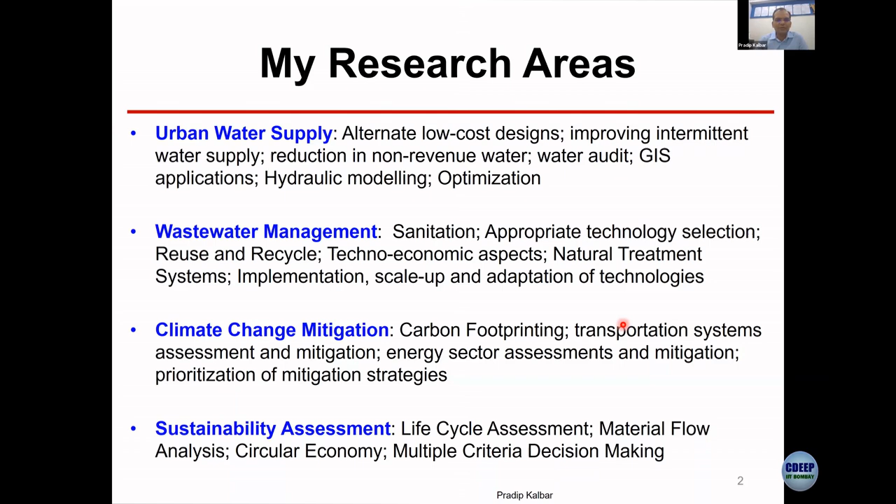So I will briefly explain a few of the topics that I have been working on. The recent work which is completed is about development of a framework and methodology for quantitative sustainability assessment. In this field, there was a lot of gap with respect to a holistic methodology for assessing sustainability of products and technologies.

So with my collaboration with Professor Monia Niero from Aalborg University, Denmark, we developed and proposed one methodology for assessing sustainability of products. This particular work recently received the Prisma Award, which is given for groundbreaking research on sustainability assessment and policy. This is the publication for which this award was given, in Resource Conservation and Recycling.

And then I also recently applied and improved this framework for selecting the appropriate location, with the help of Vinay Yadav, who was a PhD student with Professor Karmakar and Professor Dikshit in CESE. And in a book chapter, I documented the entire framework with my PhD student Deep Jyoti Das, who is currently working with me.

The next piece of work is on a quantitative approach for urban coastal areas classification. In India, there is a prevailing regulation of coastal regulation zones, which is a policy by which lands are classified. But that particular framework had a lot of subjectivity and it lacked scientific principles.

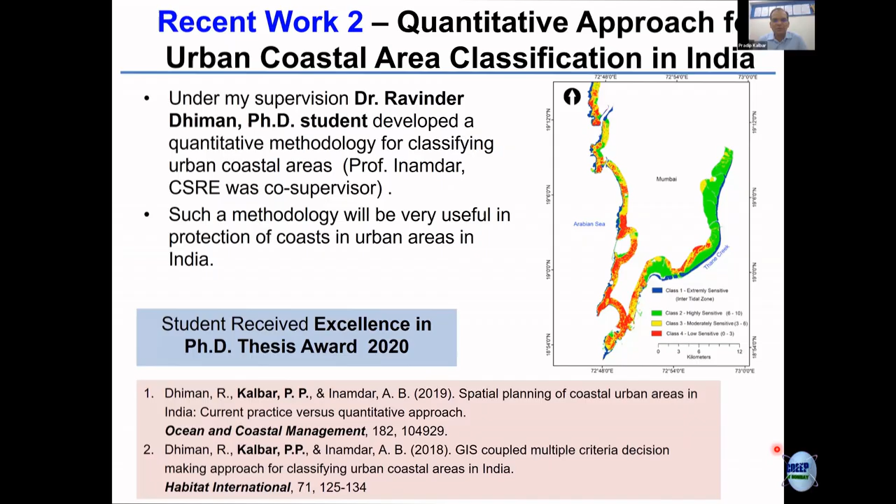So these two publications are outcomes of this work, and some are under review. And this particular student's work has received the Excellence in PhD Thesis Award for this year.

Then I have ongoing work with one of my students, Nikita Kakwani. She is working on circular economy of the urban water sector in India, because particularly for this wastewater and sanitation sector, technology is not the issue. The appropriate technology for a particular location, a particular setting, is more important. And circular economy helps in providing some impetus for adoption of these technologies.

So whatever policy gap, whatever other management kind of support is needed, circular economy provides that kind of framework.

So basically, first we reviewed the terminologies, reviewed the entire literature on what is happening worldwide in this particular sector. Nikita, in her third year, has published this comprehensive review about circular economy in the urban water sector, where we have documented challenges and opportunities.

We have proposed a framework defining basically what is reuse and recycle, because a lot of ambiguity in these terms was also observed. So the work is in progress, and now she will actually be quantifying the circular economy, at least in the urban water sector, for cities in India.

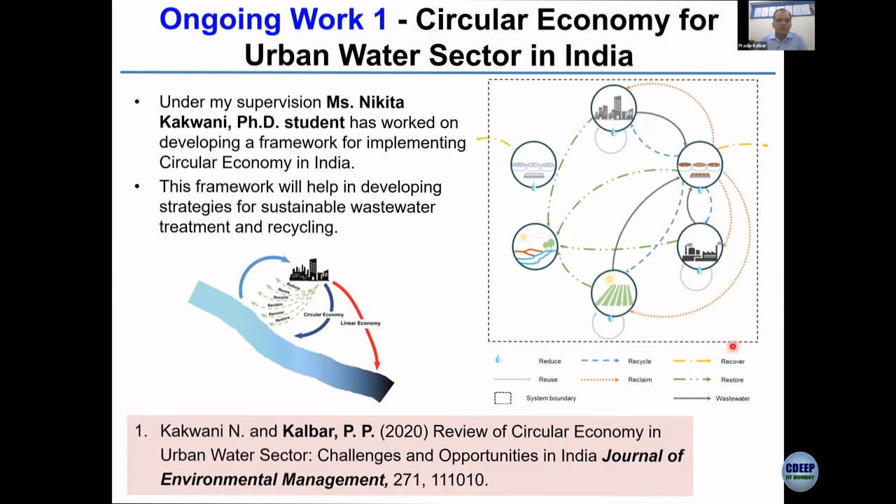So a few case studies we are working on. In this direction, I have a collaboration and a project funded by the Department of Science and Technology, which is a 5-year long virtual innovation center that they have funded with NIH Roorkee, CESE IIT Bombay, MNIT, and IRMA Gujarat.

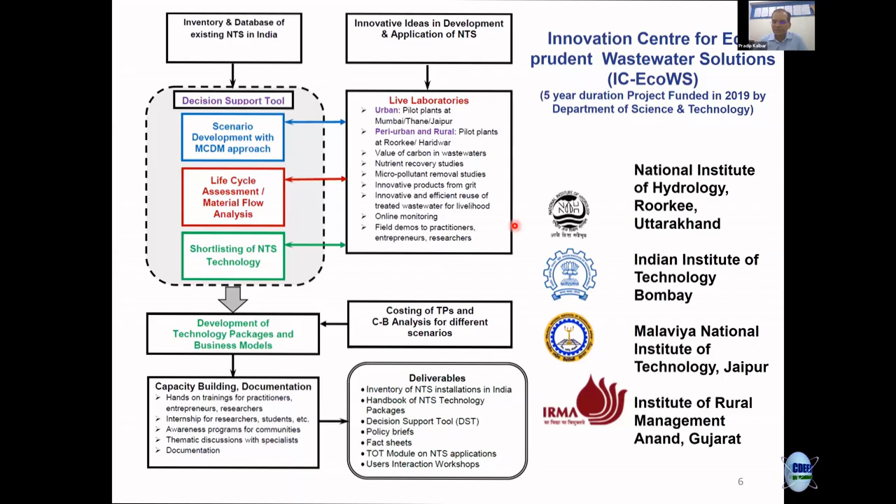And here, what we are going to do is basically develop a decision support tool for selecting natural treatment systems, which are not energy intensive, but looking at how we can promote these technologies and create suitable business models and surrounding situations. So it's a technology package development and decision support tool development, a 5-year long project that we are working on. So this is one theme of the work.

Another theme of work is environmental assessment of urban passenger transportation. I have a collaboration with Professor Nagendra Velaga from the Civil Engineering Transportation Group, and Deepjyoti Das is a PhD student working on methodology development and systems modeling.

We are basically assessing what we need to do regarding proposed interventions such as e-vehicles and car sharing models, and how they will impact or change the environmental impact of passenger transport—whether it will increase or decrease, and whether that will be sufficient to meet global and national climate change commitments. That particular angle we are investigating.

These publications are under review, and this student is soon going to conclude this work.

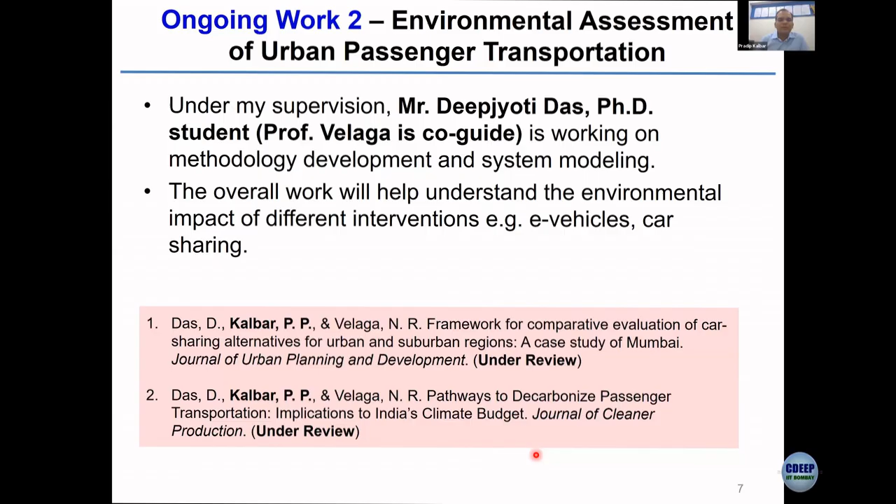The final major work area I'm working on is alternate design and operational strategies for improving water supply systems in India. This water supply system in India is a very multi-dimensional problem, not only from a technology standpoint but also involving tariffs, consumers, and government bodies. In none of our cities do we have continuous 24 by 7 water supply, which is the ideal objective. All developing countries have this issue, but why are we not able to achieve that, and how can we first improve the ground reality—that's what this particular topic is about.

Whatever solutions industry gives are not suitable for Indian conditions—they come from Western or developed countries' contexts and just try to impose them on our government. Based on my industry experience, field work, and research, I have proposed some low-cost interventions for improving this. Two students, Anuj and Abhishek, along with Professor Damani, are helping me a lot in this direction. These interventions recommended by me have been adopted by the Ministry of Jal Shakti, which has asked all states to look into and implement them.

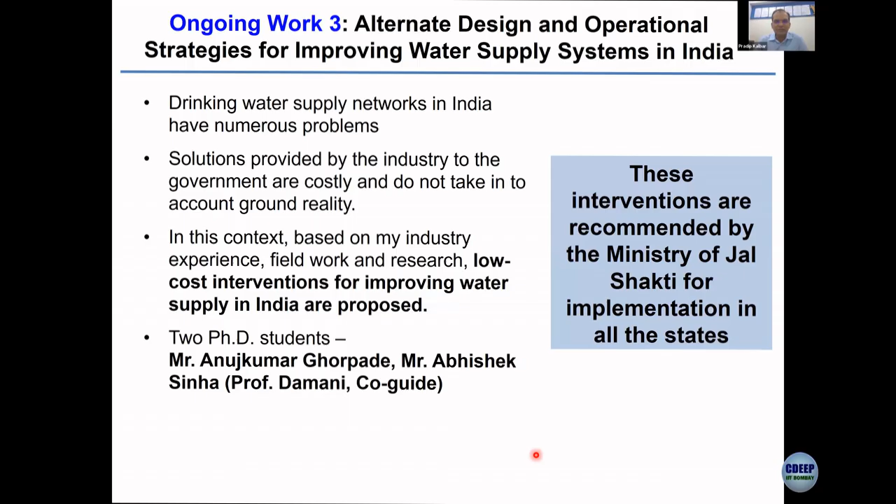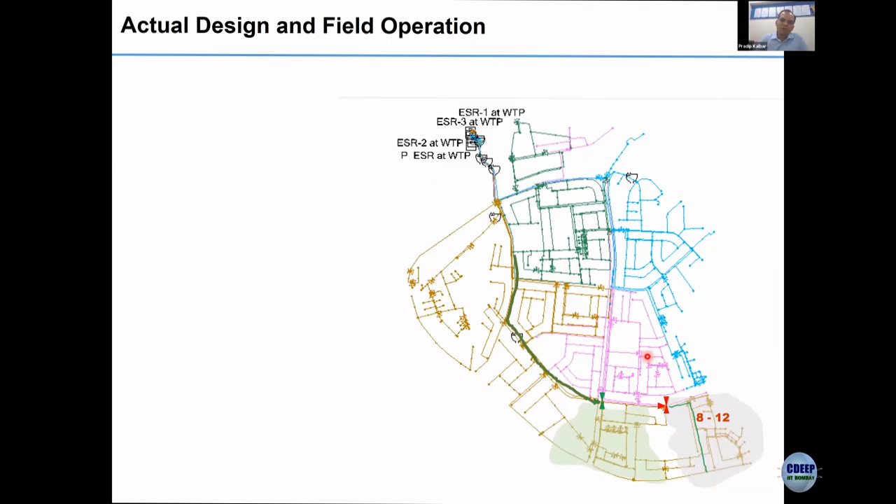Let me briefly explain what we are trying to do. In actual field conditions, for any given city or small zone, the entire water network is mixed, and tracing that network itself is a challenge. All storage tanks and reservoirs are placed at one location, creating another complexity. There are no distinct zones or subzones formed, and water distribution systems from all the tanks are interconnected. So there is no mapping, no scientific isolation of the pipelines, and no control on withdrawal.

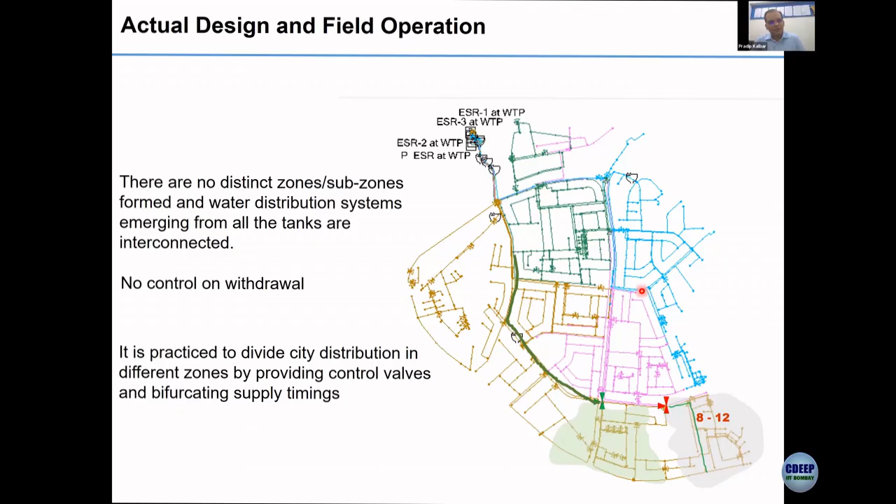Whatever design theory says—that consumers will consume a definite volume of water—doesn't work out on the ground. Everyone has open taps and open storages, so as soon as water is supplied, it is consumed. It's common practice to divide the city into different zones using controlling valves and bifurcating supply times. We are trapped in a vicious cycle: there is no service, so there is no money, so there is no money for maintenance, so consumers are not willing to pay.

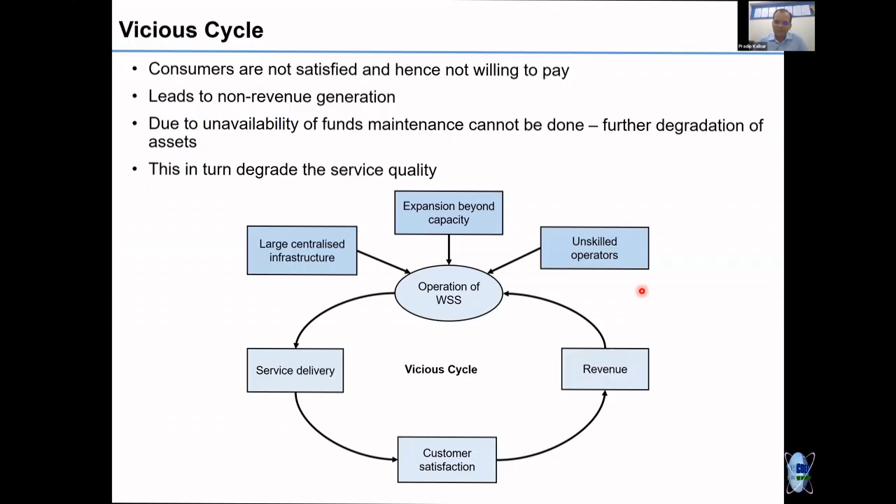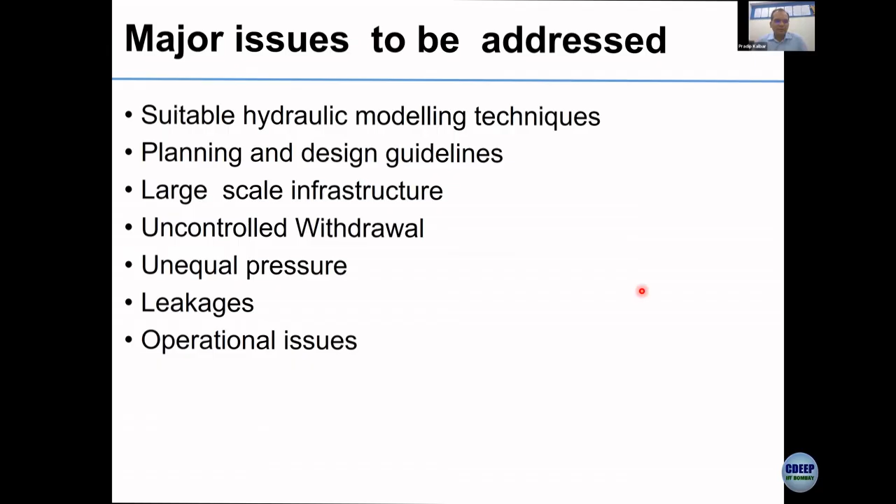We are developing solutions to come out of this vicious cycle—whether it is rural, peri-urban, or urban, every urban local body faces the same problem. The major issue we are addressing is how to develop suitable hydraulic modeling techniques, because that is a big gap—the modeling procedures applied are not relevant for Indian conditions, and planning and designs are not suitable either. We have issues of large scale infrastructure, uncontrolled withdrawal, unequal pressure, leakages, and operational problems. My research group is focusing on this.

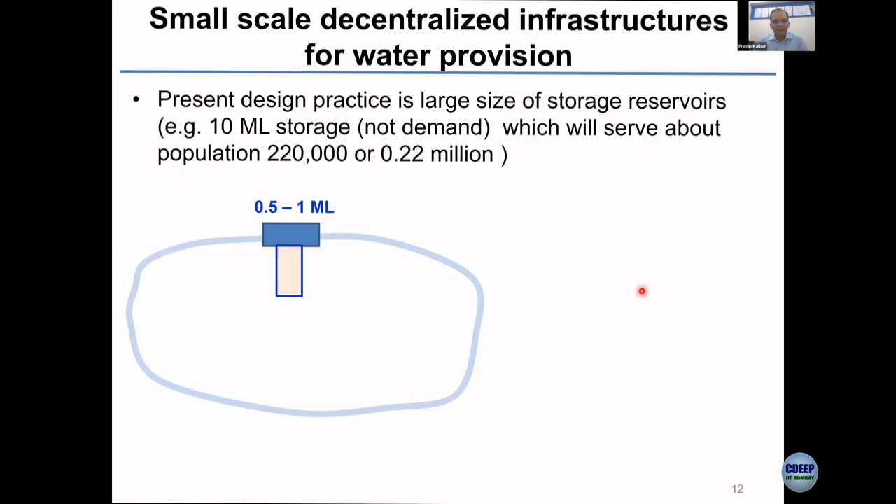So what we are proposing is a small scale decentralized infrastructure—instead of having very large centralized tanks, we can have a small... Professor Kalbar, last two minutes.

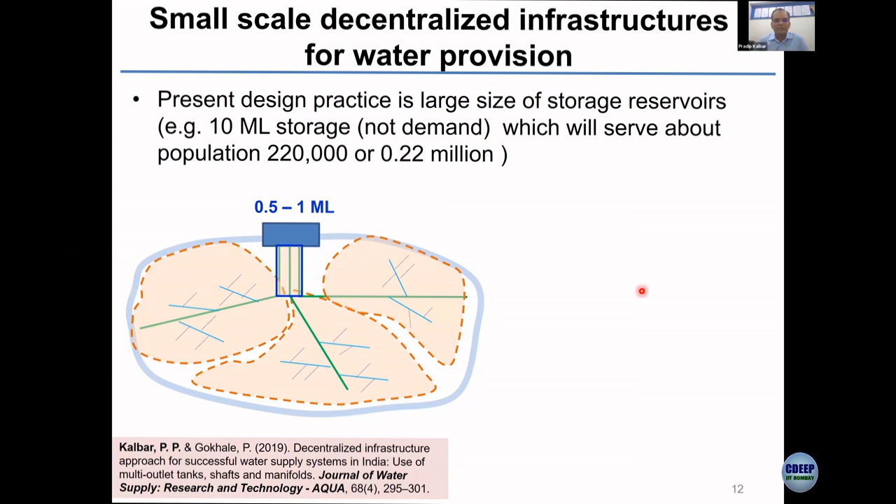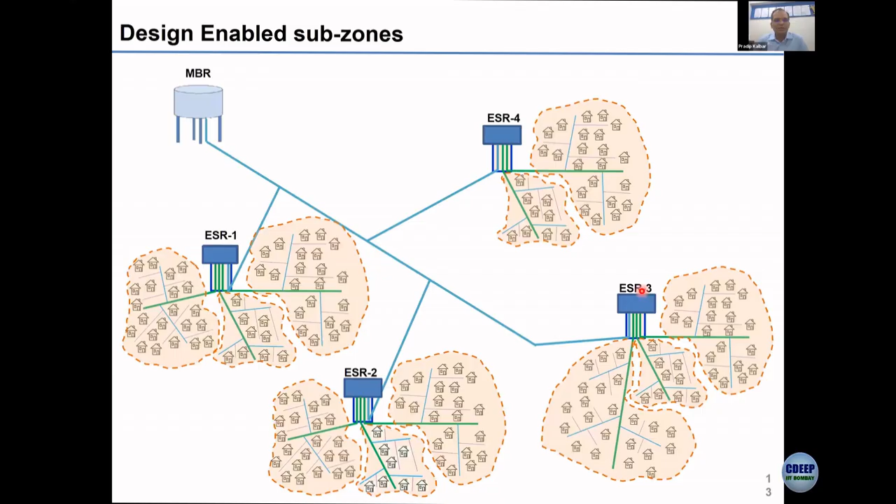Yeah, thank you. We have proposed these multi-outlet tanks as one strategy for this improvement, for urban, peri-urban, or rural schemes, so that distinct design zones can be achieved. We have shown the hydraulic improvement using particular modeling techniques—how this multi-outlet system is better than a single outlet system, which costs nothing extra. It's just a change of design practice.

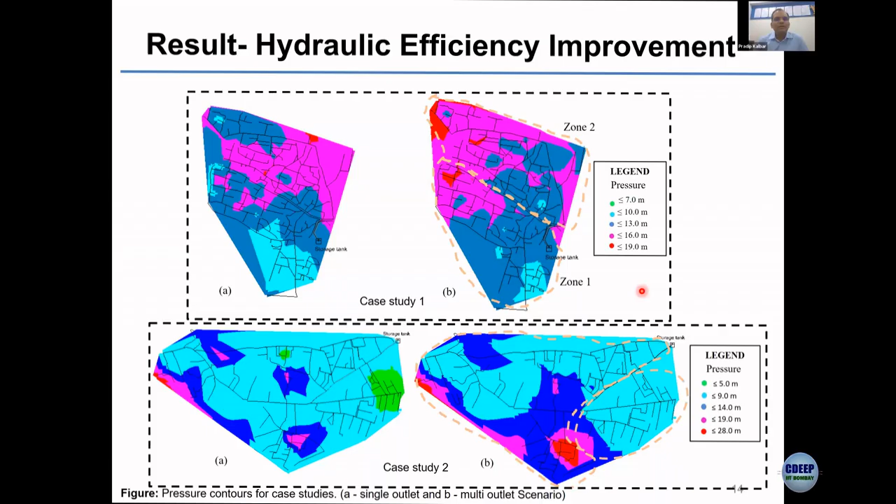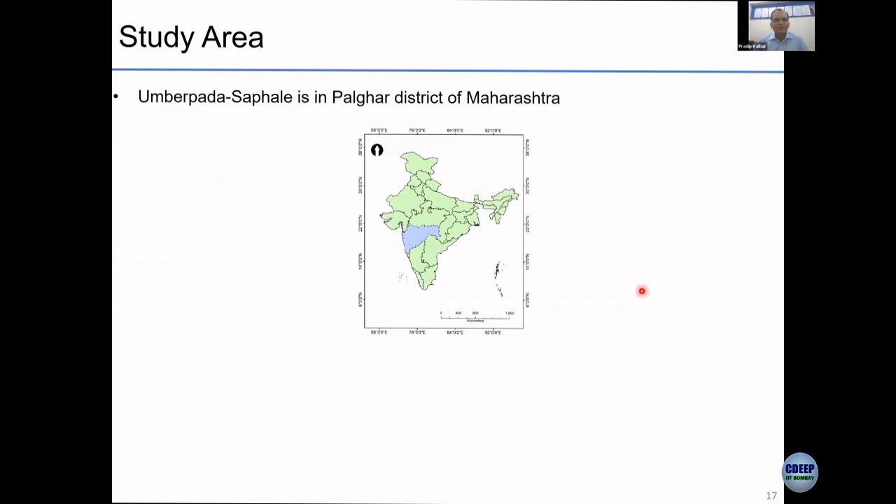We are also proposing a shaft kind of intervention to replace storage tanks which are leaking or old. This shaft structure is being demonstrated in Palghar district, in Saphale, which is actually an urban reality—although it is a gram panchayat, it functions as an urban setting.

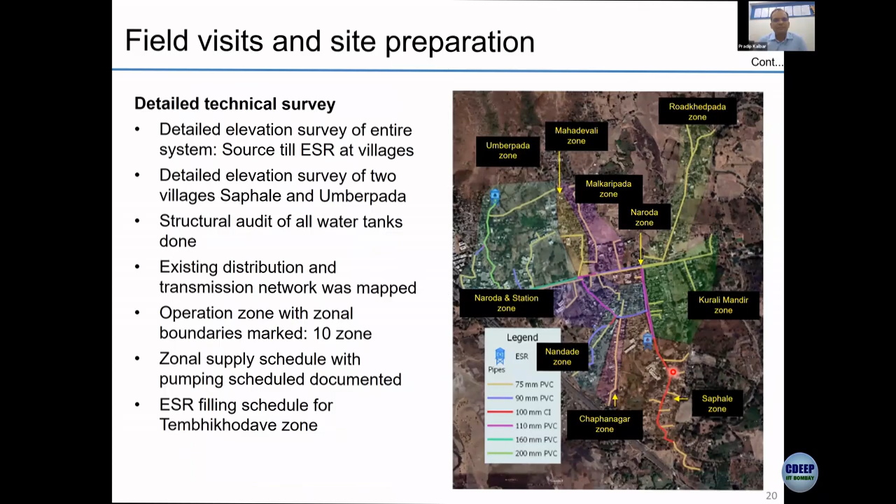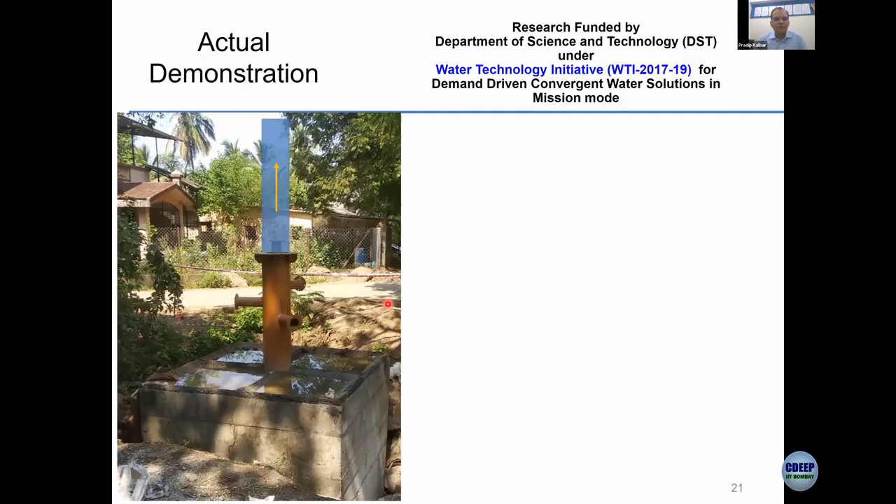We had various meetings and workshops with them to understand their challenges. My four project staff and two PhD students stay there—we have a flat there, so all the staff is deputed there. We've had multiple meetings with stakeholders and conducted a lot of sampling. We entirely documented and mapped the area, and now, with DST funding, we have actually constructed this shaft, which will be completed in the coming two weeks. This is funded by the Department of Science and Technology.

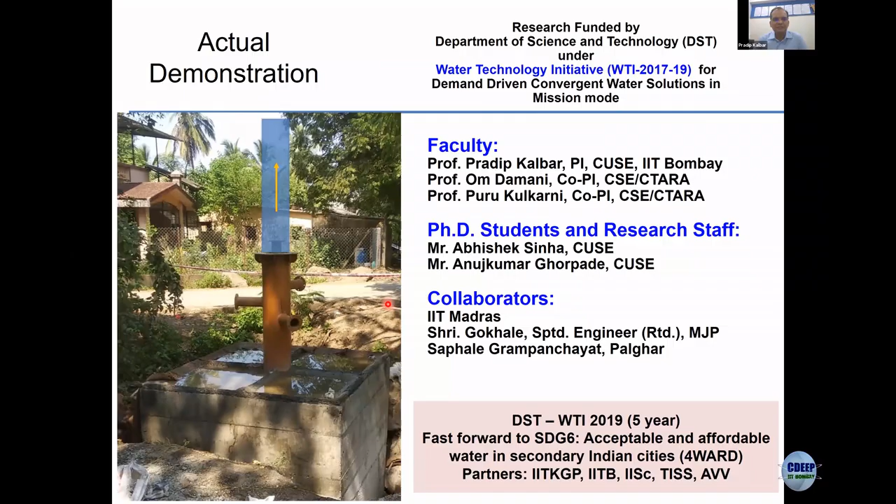I have also received another project for the extension of this work on sanitation and water supply in second tier cities. All these recommendations from the Jal Shakti Ministry have been adopted, and I'm working with state governments to complete these demonstrations.

I would like to acknowledge the students—I'm very fortunate to have this wonderful team, all faculty colleagues past and present at CUSE, faculty collaborators on campus and external collaborators, and the very generous funding received from DST through three large-scale projects. Thank you.